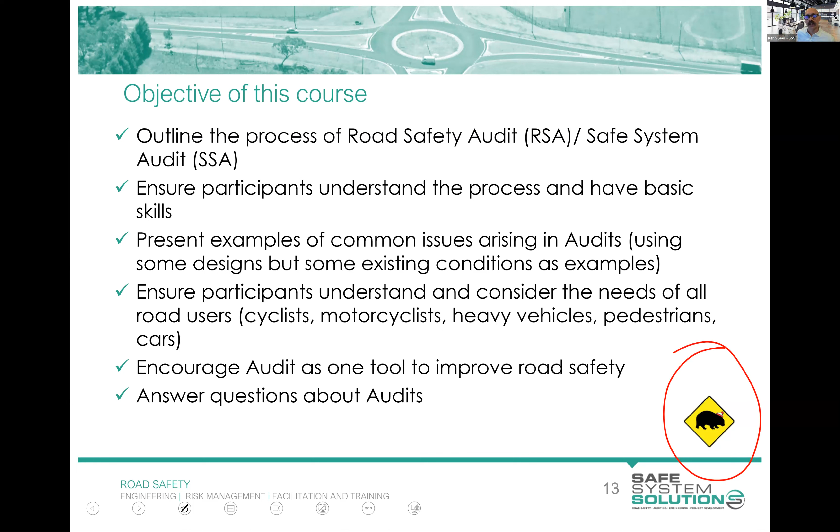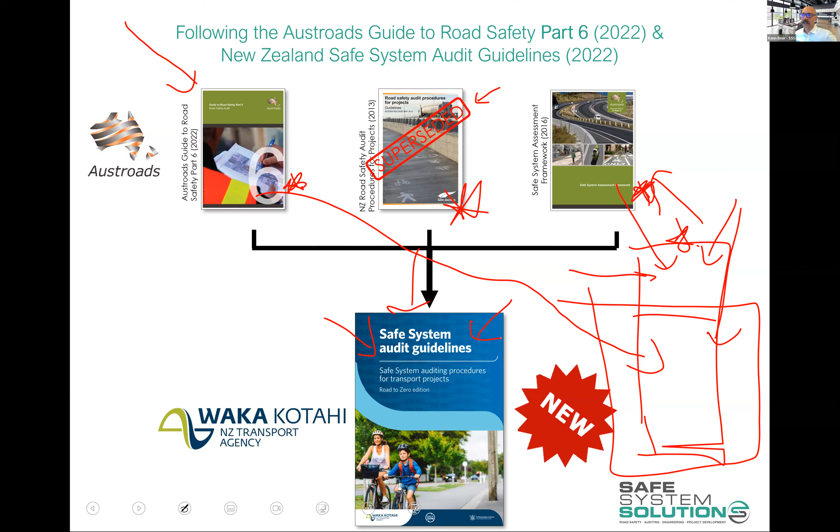You're all good, Ken. Okay.

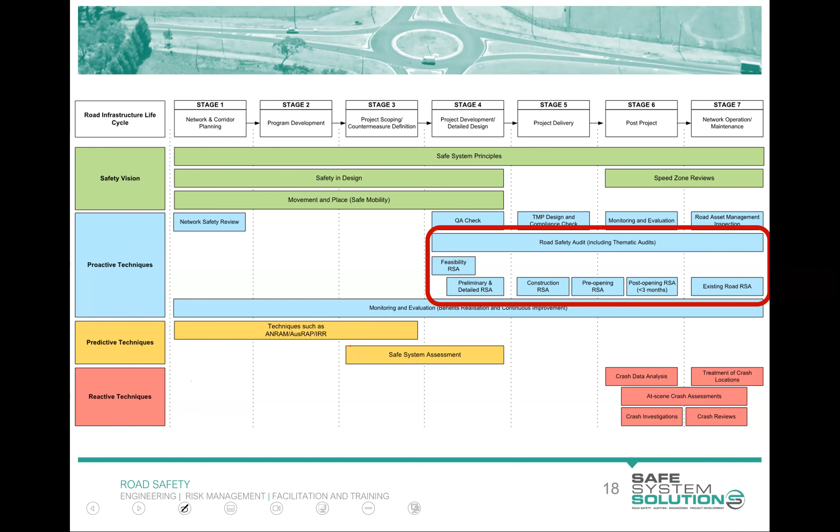And we have some questions. Bridget's noting that IRR doesn't incorporate speed, which is... well, it's because it was, I suppose, invented to be a way to look at which roads need their speed to be dropped. That makes sense. Actually, that's a prize-worthy comment to know that detail. Prize for Bridget.

Sean's also asking about the status of KiwiRAP and Waka Kotahi. It seems to be shelved at the moment. Any insights there? I'm not 100% sure. I use AusRAP a lot, and AusRAP and KiwiRAP are the same. But whether it's being promoted and used by Waka Kotahi is a fair question, and what changes are happening with it. I'll take that as a note and find out—having breakfast with a Waka Kotahi person tomorrow morning, so I'll be asking that question.

Okay, awesome. I just took a note of that.

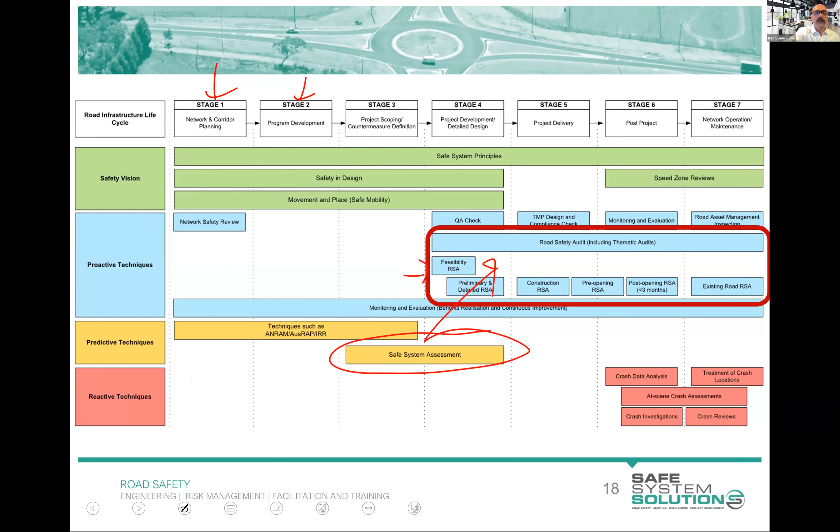But we're really going to hone in on this road safety audit. You can see that in the life cycle of a project, from planning a network and developing upgrade programs, you get to the point where you've got an idea of what's happening, or you've got a design, and then you look at how good that design is from a safety perspective. This safe system assessment is being thrown in there as part of this new process.

Okay, let's get into a little bit of the basics of the idea of road safety auditing safe system.

The first thing to understand is that meeting standards does not guarantee safety. It's a decent starting point to know what your standards and guidelines say and whether you're conforming to those. But a fundamental thing for an auditor is to understand that their job is not to assess conformance with standards and guidelines. Their job is to find out how our community is going to be killed or seriously injured. I don't care whether it meets standards or not. If there's a risk there, we report it.

Now, a fair question to ask is, why on earth would there be risk of death and serious injury if we meet standards? Well, that's a complex question, but there's a few reasons. One is that sometimes our standards and guidelines have done this old school way of thinking, which is to balance mobility and safety, and say we still need to move people around this network, so we'll just find a nice balance of killing our community with moving stuff around. We don't take that attitude anymore under a safe system approach. We say, no, we will make it safe, and then we'll move stuff and people around as quickly as we can within that envelope. But we are lagging a huge inheritance of standards and guidelines that don't think that way.

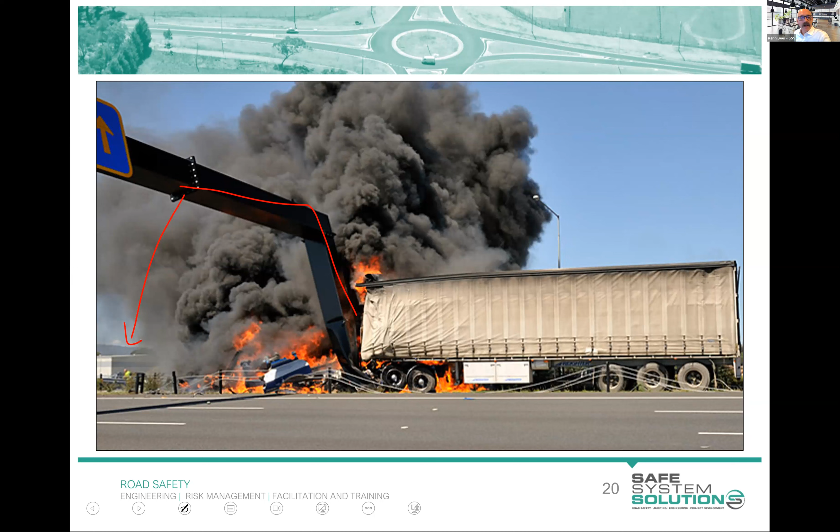So that's our test vehicle. Now, some of you might be trembling a little bit, thinking, oh my God, I don't know all of this stuff about barriers. Is this what road safety auditing is about? Am I out of my depth here? Don't worry too much, because you undertake audits in teams.

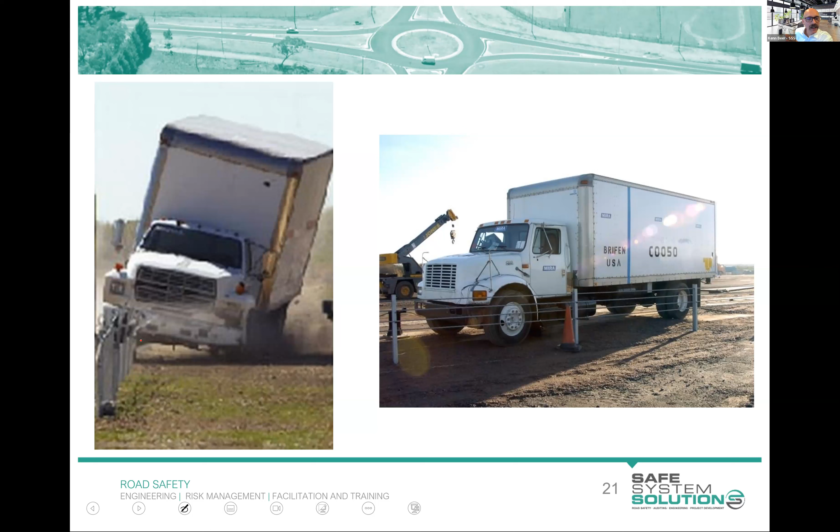And what you do is pull together a team that has the appropriate expertise. You would expect people in your team to have barrier knowledge that would understand some of this if you are doing that. You will build knowledge in these areas as you go about your auditing. Some of you might already have this type of knowledge, or at least know where to find that. But the important part is not actual technical knowledge here - it's asking the right questions. It's saying, when a large vehicle leaves the road, will that barrier hold it and contain it? And thinking about that context.

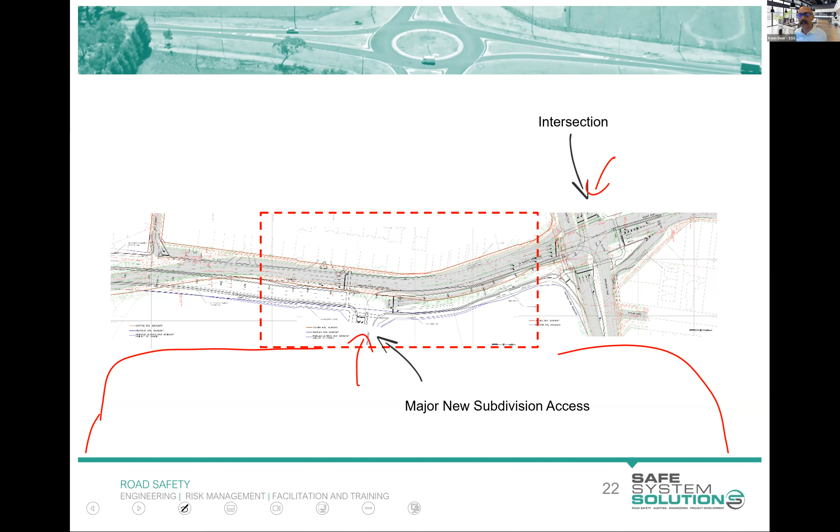I'm going to zoom in on this so we can see a little bit clearer. So here's their design and their plan, and this is the kind of time you are road safety auditing. Often you're given a design like this, a drawing, and they say this is what we're planning to build. And then your job as an auditor is to tell them what are the risks if they build it exactly as they've shown it. So here we see the new signalized intersection, this main street being new - it doesn't exist at the moment. And we're looking at this and we might find quite a few issues, and we'll be thinking about different things.

But here's one: if you're that car there, or we imagine a car there, and it's going along at, say, 65 kilometers an hour - it's a 60 zone, but maybe they're going a little bit fast - and they're traveling along straight through, so they're going straight.

Oh, I'm in a right turn lane. Okay, and this is what is termed a trap lane. A trap lane is a common thing that we find in audits. Trap lanes are not technically against standards. They are discouraged in some guidelines. Austroads discourages trap lanes, but you can't flat out say this does not meet standards.

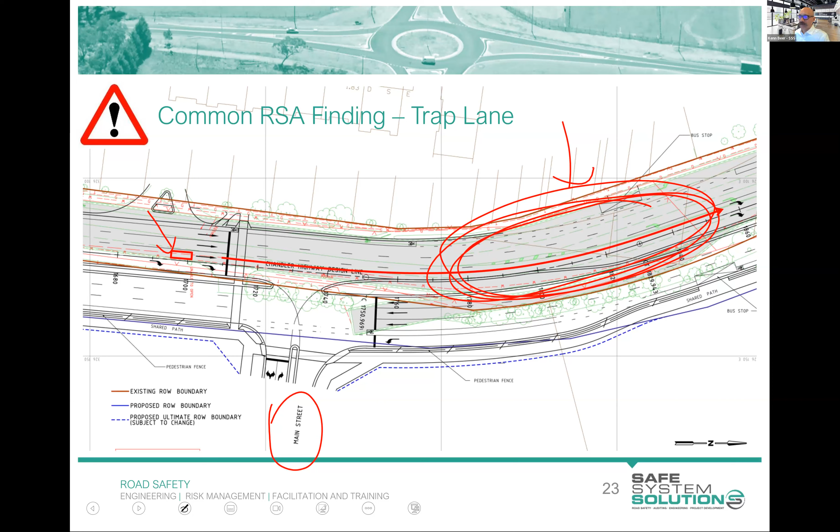But trap lanes are a common one. Now, Kathy, I think I've been doing enough talking here. I'll see if there's any questions, and then I'm going to get these people to do a little bit of... well, it's not really road safety auditing, it's looking at a crash and thinking a bit like an auditor. But anyway, I'll explain it. But anything I need to deal with?

Just to clarify, we have had this answered by others in the group, but is there ever an acceptable scenario where the design and the road safety audit can be completed by the same person?

No. You're sitting there trying to think of that remote regional outback location where there's only one person, but no. So it has to be independent, it has to be separate. Yeah, I was racking my brain to think of some unique thing, but no. I mean, and I will talk about this a little bit later on, but...

That's like saying, can you proofread your own letter? I mean, yes, you can look at your design with all of the knowledge you have as a road safety auditor, that you've done the design, you look at it, you're thinking about all of this stuff, but the independent check will identify things that you won't see yourself just because you're too close to it. And second of all, as I talked about with those major projects, or actually any project, if you are the designer or the project manager, you are dealing with all sorts of stuff.

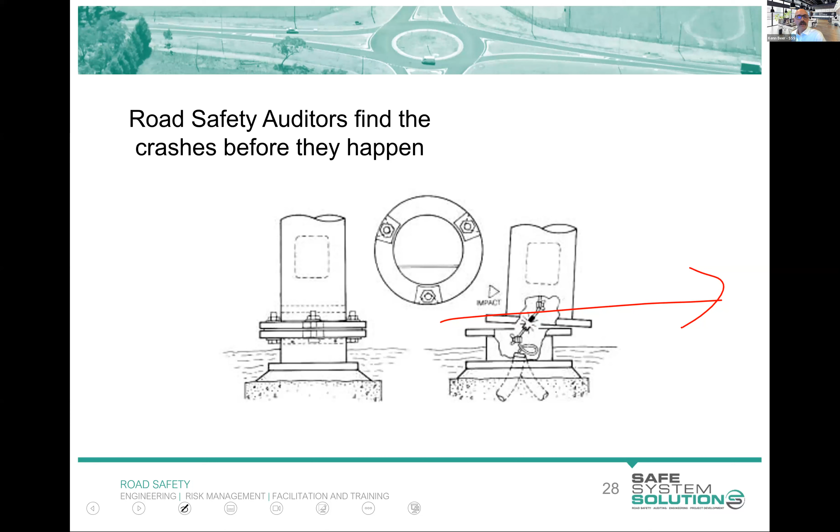So as a road safety auditor or a safe system auditor, we're really interested in, yes, trying to stop crashes happening, but also understanding when they do happen, how do we prevent our community from being seriously injured or killed? And how do we make it so it is just damage to the vehicle or the infrastructure, or very minor scrapes to those involved in these crashes?

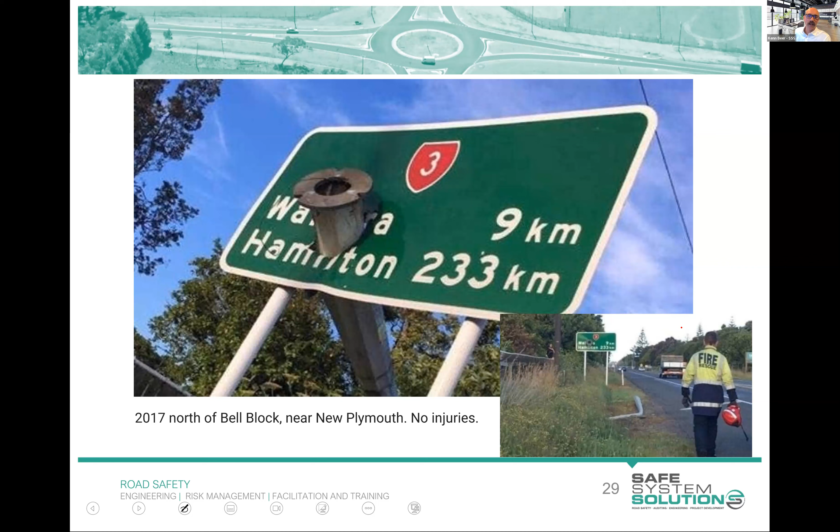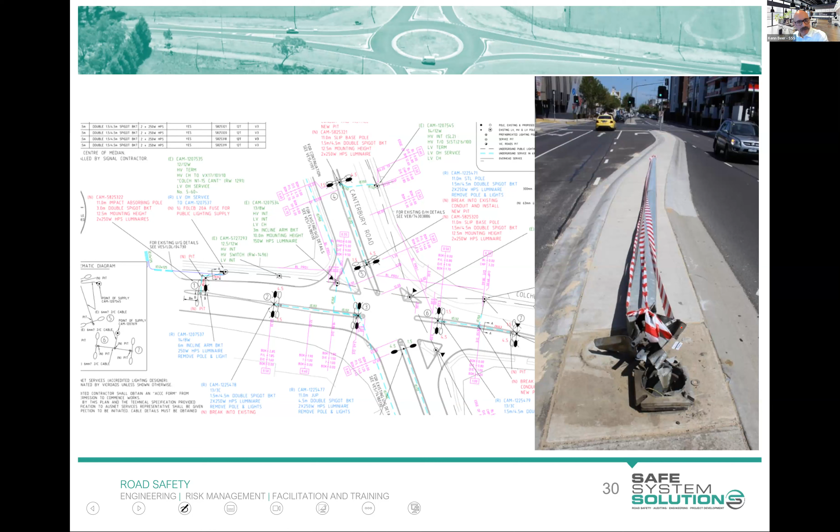You'd be thinking about a whole lot of things. Are those lights going to create one of those see-through effects? What type of poles are they using? Where are they located? Are they slip-based? Are they rigid? And maybe, in some of these locations, what could be the issue if they did decide to use slip-based poles for all of these lights? I mean, they're thinking about the safety of people leaving the road, hitting these poles. We've just talked about it.

But what other issues could arise if they did use slip-based? Anybody got any ideas on that? Pop it in the chat. All right, Will's on it. Prize there for Will, just first to get in, lots of others.

That's right, context. It's always important to think about the context of these things. We've just established frangible poles are great for the vehicle occupants, but they're going to fall. You saw one fling through a reassurance sign. If this is a heavily populated pedestrian area, vehicles are going to hit that, and then they're going to drop it onto pedestrians. So we need to be those eyes that think about the context.

Again, it's standards and guidelines. Some standards and guidelines will pick up on this, and some standards and guidelines talk about you can't use slip-based poles in speed limits under 50 or 60 kilometers an hour. But where the poles are going to fall, pedestrians, power lines, and the like, is an important factor for us as auditors to consider.

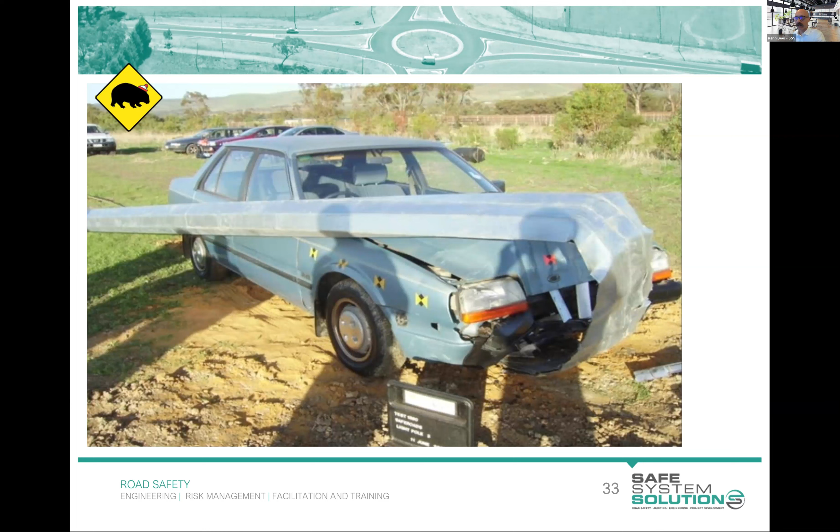So we want to think about where they fall. Where are they going to fall if they're slip based?

Kathy, I think we might take a 2-minute break.

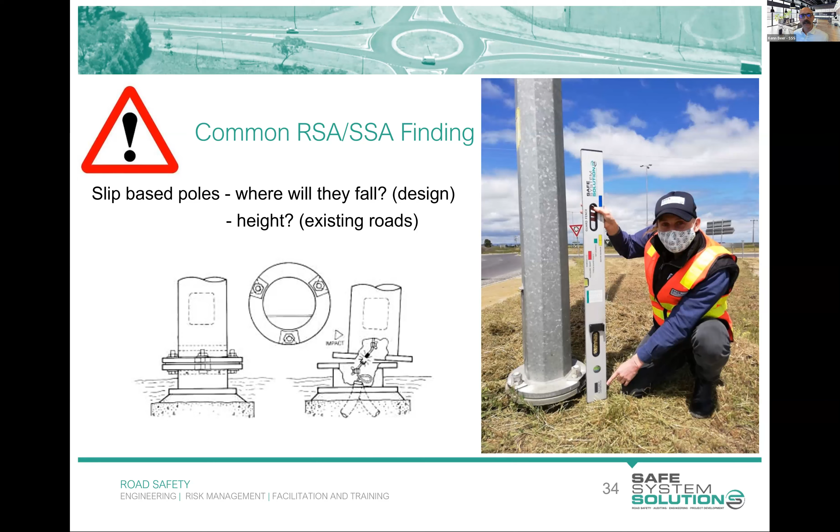Sounds good, Ken, because it is half time or intermission, depending on your brand of choice.

Now, I did want to answer an earlier question about the certificate people get for this. I can't quite find the question at the moment, but it was whether the certificate will be in the SSA, the Safe System Audit format, or the Road Safety Audit format. At the moment, this one will give you a certificate that says Road Safety Audit. If you've previously done the Safe System Assessment course, that program and this program together are kind of like your Safe System Audit. But later this year, we'll be working on combining the two programs and offering one. We are very much in that transition stage at the moment, so you won't be missing out on the latest and greatest, because you're getting it as it comes to us. So this very much is a bit of a road safety audit / safe system audit type course at the moment.

Would that be right, Ken? Yeah, the certificate you get from this, you are absolutely able to undertake a safe system audit, and you meet all the requirements around that. You will just need to either skill yourself up or do our course on the safe system assessment part of that. There's nothing stopping you from undertaking that process once you finish this, you just need a little bit more knowledge. So hope that answers it.

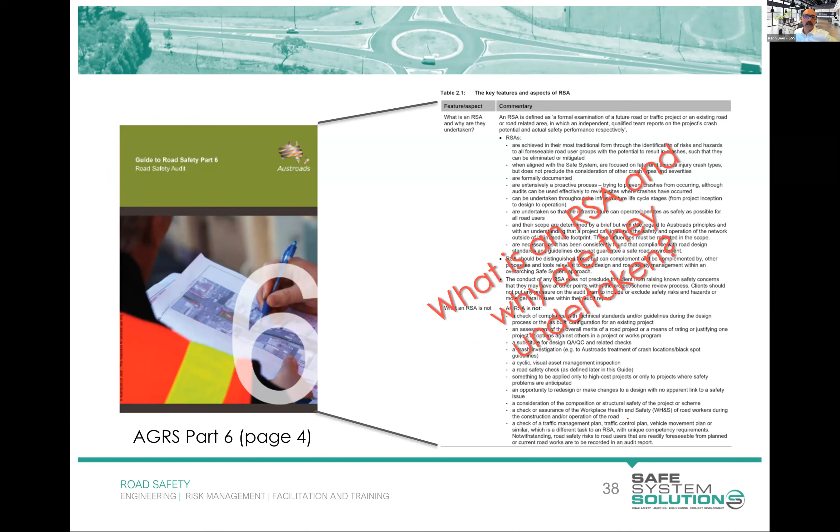Now I'm going to take you through what a road safety audit is. And as we said, safe system audits, New Zealand's down that track is a little different. But you need to know, okay, what's a road safety audit? It's a formal examination of a future road or traffic project or an existing road or road-related area in which an independent qualified team reports on the project's crash potential and actual safety performance. That is the Australian definition.

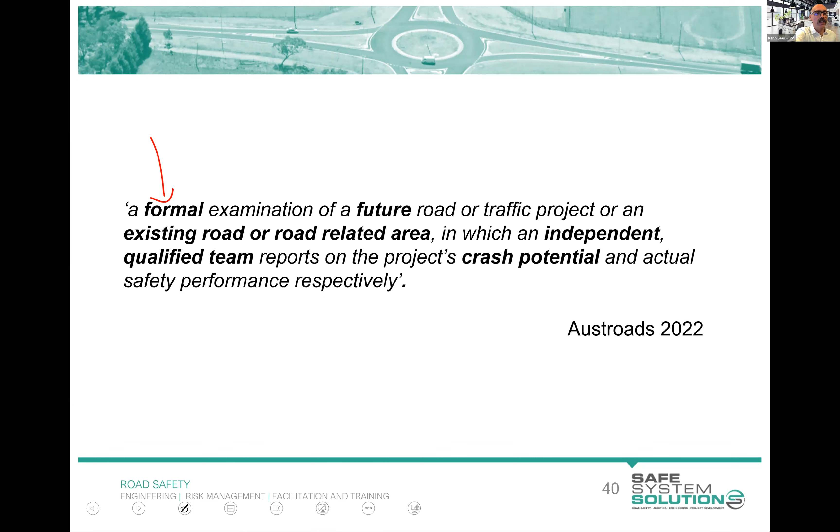Okay, it goes in and then it starts to elaborate on a lot of that, but that's part of it. It's formal - there are specific steps to take, and there's a formal reporting mechanism, and you sign it off at the end. These are formal documents. We do it for future projects - you can, in a lot of jurisdictions, do it for existing roads too, but future road projects, so designs.

Independent, we already talked about - can't audit your own design, can't audit your own project, can't be the project manager of it. You can't even audit if it's within the team that you're manager of, because you're not independent - you're being influenced by a whole lot of other things. Qualified teams, yeah, so as we say, completed this course or other relevant courses, and we're thinking about what are the future crashes that are going to happen.

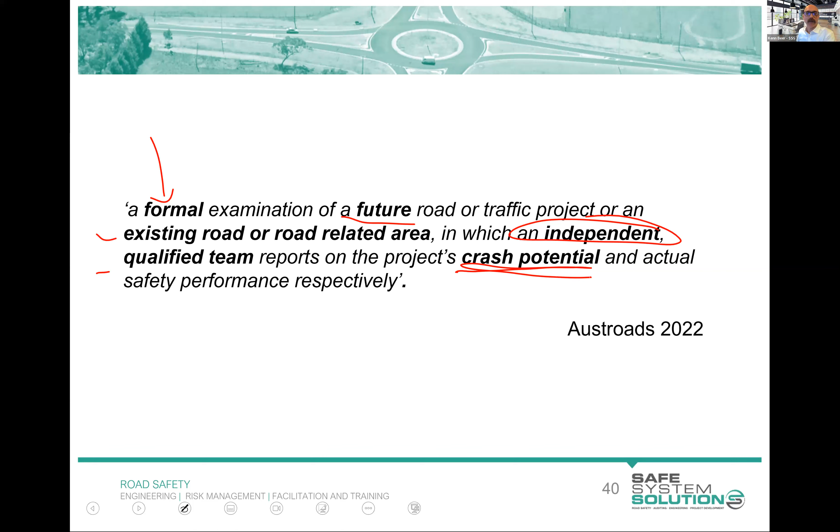When we look at a safe system audit, there's a lot of similar characteristics. It's a formal, robust technical assessment, same as a road safety audit, but with independent and qualified teams. We're considering the safety of all people, no matter what mode, and applying safe system principles. It's also not a review of compliance with standards, same as before. So it's very much the same, just slightly different ways that we piece this puzzle together in a safe system audit.

The safe system - I think most of you will have had this drilled into you many times in your organisation. New Zealand is doing a wonderful job embracing the safe system approach. This is the safe system diagram for New Zealand, and it sets a platform for how we're going to eliminate death and serious injury over the long-ish term. But there are some really important principles in there, and I want to highlight a few of them.

We design for human vulnerability, especially important when we consider road safety auditing - we need to know the forces that are going to happen on the human body. The other key ones: we make safety a critical decision-making priority, so as we develop these projects this process can really help. And we promote good choices but plan for mistakes, which means we've got to manage the energy in crashes.

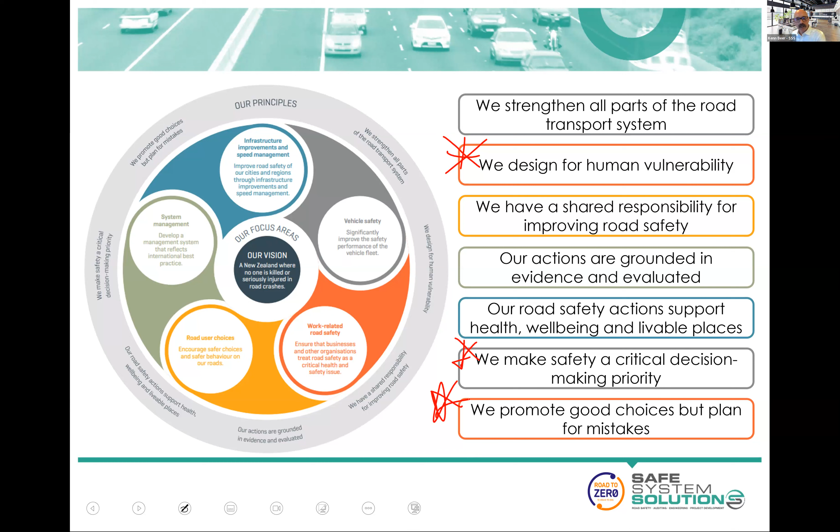All of the other principles are still important and integrated in - those just have particular grabs for a road safety auditor or a safe system auditor. That's a bit philosophical at this stage. I'll jump you straight into an example very shortly.

But let's have a little quiz just to check where we're at. Some of this is going to be a little bit testing because it's not exactly what I said. You are not marked on these little quizzes that pop up - nothing in the actual live course you're going to be marked on, but this is just to get you doing something again. So hopefully a poll's popped up on your screen. It's got four questions - a few of them we've been through, and a few might need a little bit of thinking and head scratching because we may not have exactly covered that.

Thanks, Ken. A question that's come through is: can you do a limited scope audit, i.e. a cyclist or pedestrian users audit, and not take into account cars and trucks? It seems counterintuitive and wrong to look at it from a limited scope - what are your thoughts?

It's what we call a thematic road safety audit, and we'll talk about it in the cycling module of this course. It's like a cycle path, for example, that's crossing roads - you're focusing on the issues for the cyclist, not so much the approaching vehicles and their potential issues, though you do factor a little of that in. In practice, I don't often encourage thematic audits. Where I actually see the most beneficial is motorcycle audits, where you get a motorcyclist out there and they tell you things - this is what we felt from a motorcyclist perspective, because driving through a route you don't quite get that same feel.

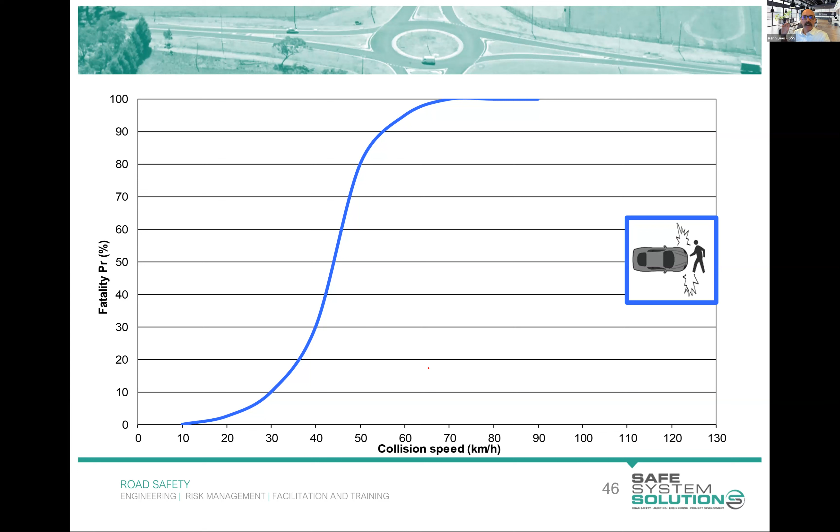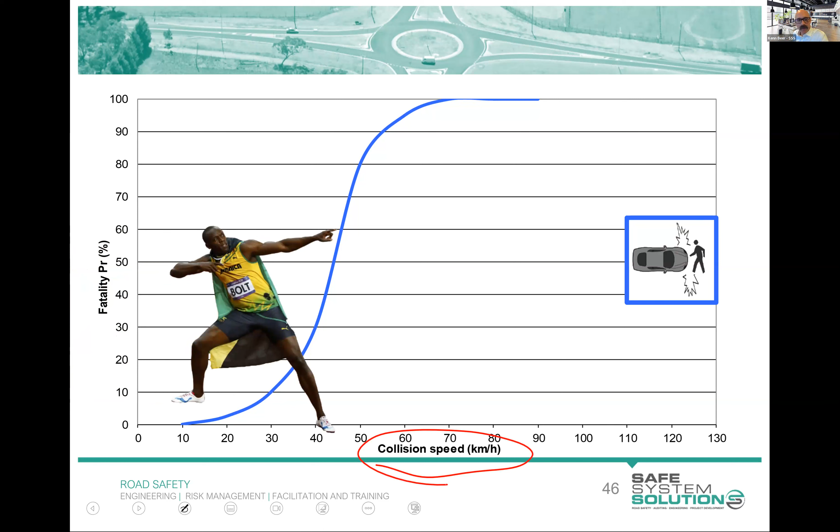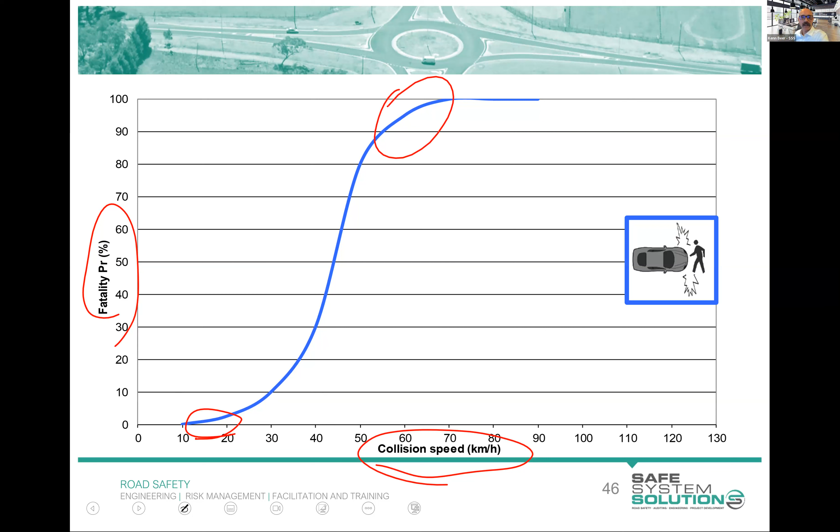Now, tiny little bit of difference in the physics here, but when a car strikes a pedestrian at 44 kilometres an hour - Usain Bolt's there - this graph shows collision speed of impact, not speed limit, just speed of impact, and the chance it's going to kill a member of our community, not Usain Bolt, any member of our community. At very low speeds, it's very unlikely that anybody struck will die. Then up at, you know, 60 kilometers an hour, when a car hits a pedestrian, we're pretty confident they're going to be killed. There'll be circumstances and occasional occurrences where they won't be, but it's going to be bad.

And the reality is the road network presents us huge areas that are far beyond the forces we can handle. We need to look at redesigning the road network so we don't have those forces imparted on humans. Yeah, the vehicles may crash at high speeds, but they should be managing the energy. We have this information for other crash types as well.

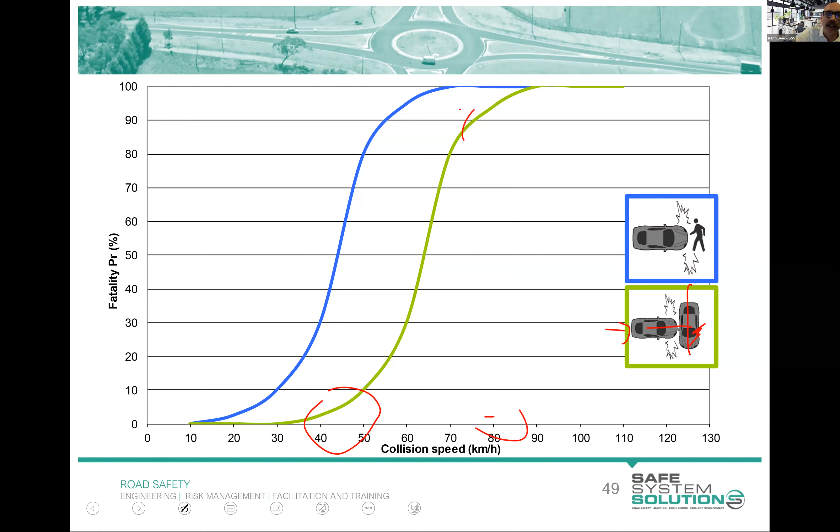Side impact crash - many of you have seen this already - we've got the bullet vehicle here doing the damage. The bullet vehicle speed, around the sort of 40, 50 kilometers an hour, is generally survivable for the occupants of the target vehicle. Up around 80 kilometers an hour is fairly unsurvivable for the target vehicle occupants. And head-on crashes, we're talking around that sort of 60, 70 kilometer per hour speed of each vehicle, so it'd be a closing speed of 140. Impact speed for the individual occupants is a 70 kilometer per hour crash.

But they give us a little bit of understanding about what kind of forces we're thinking about in crashes. And we tend to draw this sort of 10% line: 30 kilometers per hour for the pedestrian crash, 50 kilometers per hour for the right angle crash at the intersection, 70 kilometers per hour for the head-on crashes. They're about the limits we impose under the safe system threshold speeds. There's lots of debate about adjusting this, people doing their PhDs on trying to adjust this, debating whether we're ignoring these bits down here and the like, but for now we really talk to those as a threshold speed.

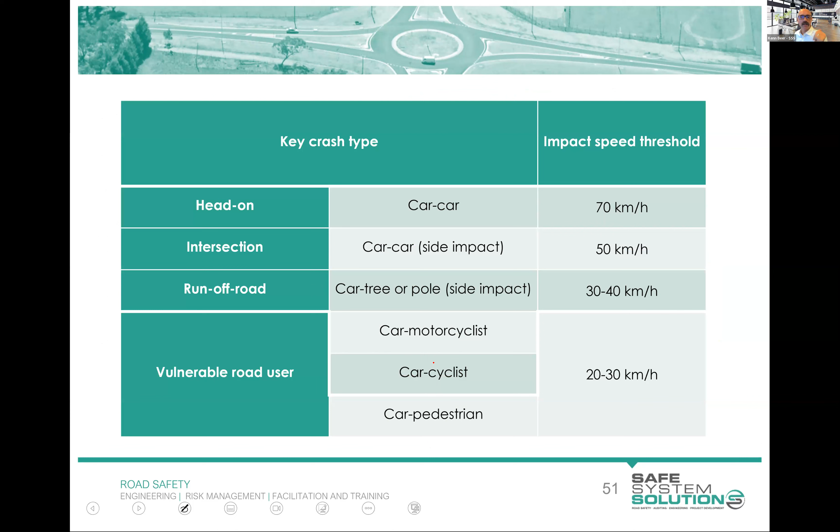And I've popped some more in there, and these are in your notes. We've got side impacts with poles around that 30 or 40 kilometer per hour, or trees - it's pretty low speed where it's very severe. Side impact into a pole is a serious incident. So you can see those put in there, motorcyclists and pedestrians.

Okay, so the old sort of road safety audit model, and some of you probably were very involved in this and have done them. We identify an issue, give it a risk rating, and then we recommend treatments.

The new safe system assessment model sort of goes, okay, let's do this safe system assessment matrix, which we're not going to take you through in detail in this course. We identify issues, we risk rate the issues, and we look at that biomechanics of injury. So those forces that I was talking about in the last slide. Where does this sit? Are we talking about lots and lots of minor incidents, or are we talking about a few fatalities or serious injuries?

So highly severe incidents. Then we recommend treatments, and we give a little bit of help to the designers and the project team to say, these treatments that we're recommending are the ones that are really going to eliminate or get us close to eliminating death and serious injury. And these ones are going to lower the risk of it. So that's how we categorize.

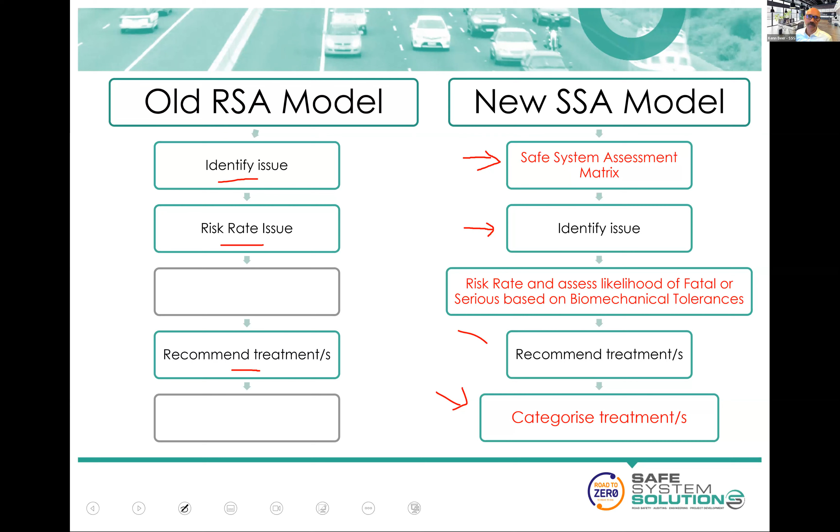The easiest way for me to explain this is just to take you through an example. And this is what we're going to do. I'm going to run you through an example, and then in future modules, you're all going to have a go at this. So you're starting to build up this practice of finding an issue and then reporting it in the correct way.

Okay, so here is an intersection. It's new. They're planning this new intersection. It doesn't exist at the moment. They're doing a left turn lane. We've got a hold line there. It's a high-speed road here and another high-speed road coming into it. It's a T intersection.

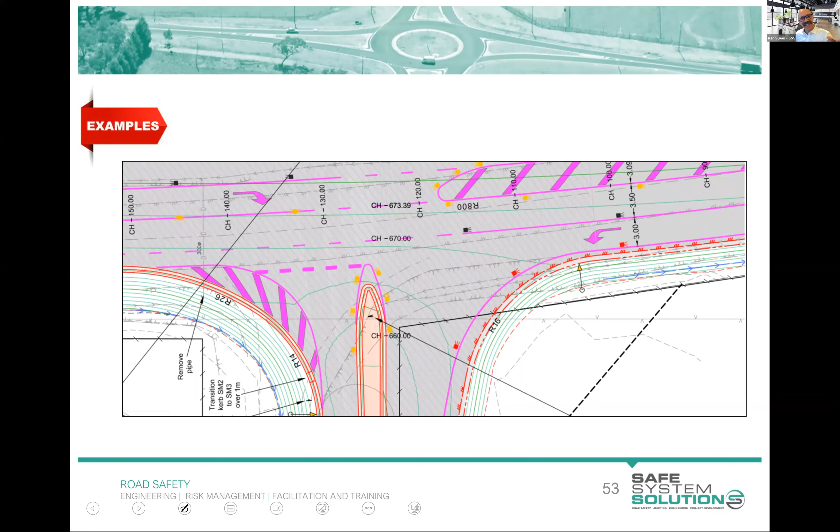Okay, it's what we call a dynamic visual obstruction. So it's a visual obstruction. It's moving. It's not always there, but we know from that configuration of that design and that scenario that this is something that we see death and serious injury result from.

You often say, why have they pulled out right in front of that car when you're doing the crash investigation? But it's because at that exact time, there was a vehicle masking the view of it. And it can be exacerbated by vehicles queuing behind, and maybe it's been a minute or two and there's people beeping and they're like, oh, as soon as this car goes, I'll go, right?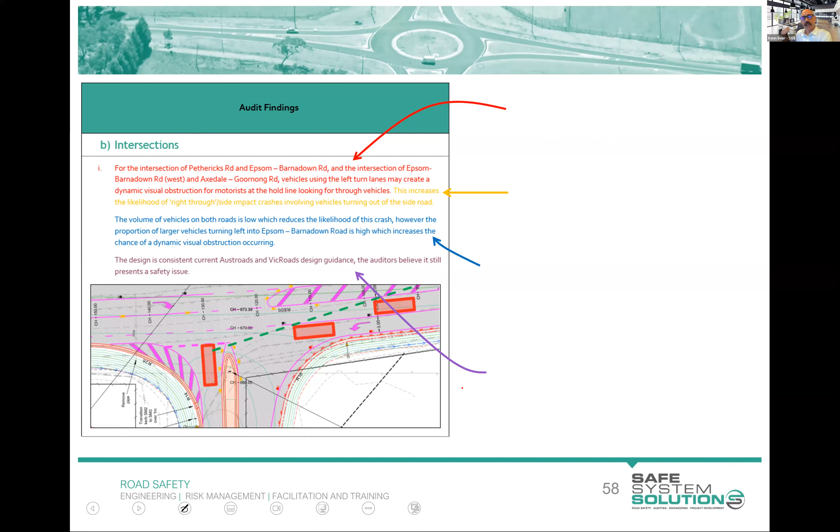And I've created the formula or the recipe. And when you're writing up your audit findings as part of this course, you will be marked on whether you're following this formula. It's good practice to follow this. When you're a very experienced auditor, sometimes you might play around with this, but as you start entering into it, just follow the formula. And the formula goes as such.

Let's explain the issue. The intersection of blah, blah, blah—vehicles using the left turn lane may create a dynamic visual obstruction for motorists at the hold line looking for through vehicles. Okay, you've explained the issue and where it is.

The yellow there is the crash. This increases the likelihood of right through side impact crashes involving vehicles turning out of the side road.

I don't care how blindingly obvious it is to you when you're writing your finding of what the crash is, you specify it. That makes sense? I don't care if you're talking about a pedestrian crossing, a vehicle overshooting the pedestrian crossing, or not having good sight lines to the pedestrian crossing—you still spell out that this could, this will result in a pedestrian being struck by a vehicle. Actually specify the crash you're thinking about.

If you can't specify a crash, it's not a road safety audit issue. People do that—you might think, why would they do that? Well, they don't like some little bit of drainage happening off the side of the carriageway, because maybe they're a very good drainage person and designer, and they say the issue is that this drainage will cause erosion to this part and seep into this house. Okay, that's not our issue. That's not a road safety audit issue. That's an issue for the project, and you might send them a little email: hey, I noticed this, by the way—not going in a road safety audit report.

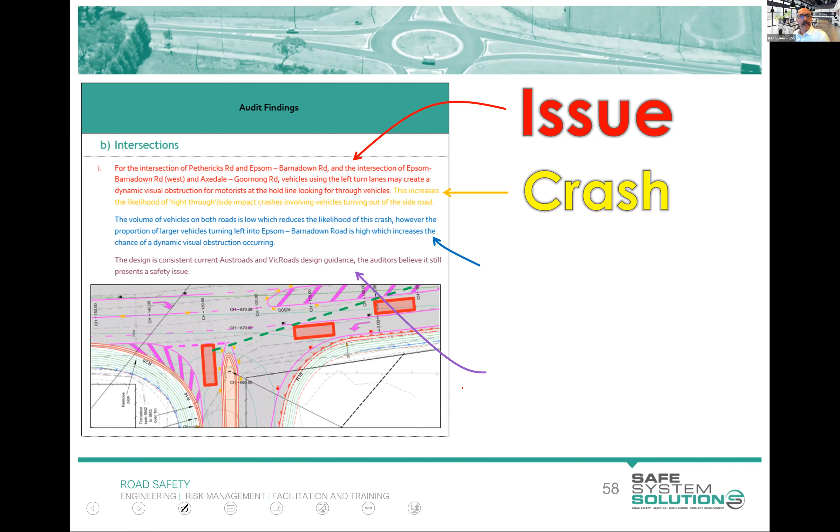So what's the crash that could happen as a result? Then you make some general commentary about what factors may increase the risk, decrease the risk, or alter the risk. In this one, we say the volume of vehicles on both roads is low, which reduces the risk—not many vehicles on these roads. However, the proportion of larger vehicles turning left into Epsom – Barnadown Road is high, which increases the chance of the dynamic visual obstruction. A bigger vehicle turning left is more likely to mask that other vehicle, so we're more likely to see that happen.

Then this purple one: any standards or guidelines, if applicable. Remember, standards and guidelines are not what we're checking against. But if you actually happen to find that this does not conform to Austroads or Waka Kotahi guidance or local council guidance, and you've got that, great—put it in. It just backs up the finding.

Interestingly, on this one it said the design is consistent with current Austroads and VicRoads design guidance, but the auditors believe it still presents a safety issue. There's one that actually just flat out said: hey, we know this meets standards and guidelines, doesn't mean it's safe.

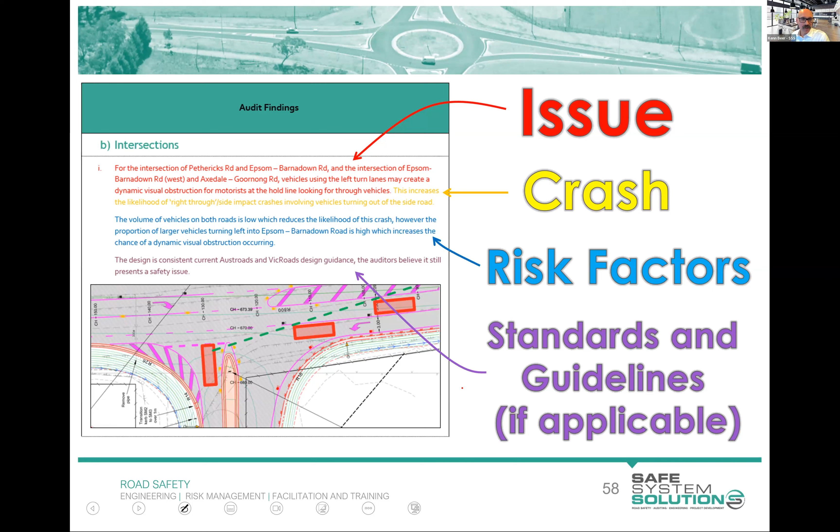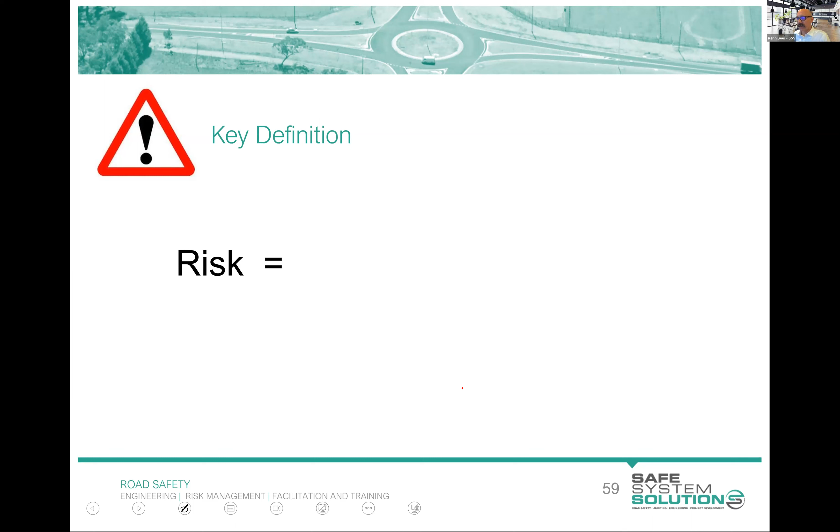So then we've got to risk rate this. Now, risk is the chance of a crash happening—the frequency of it, the likelihood of it—multiplied by how bad it's going to be.

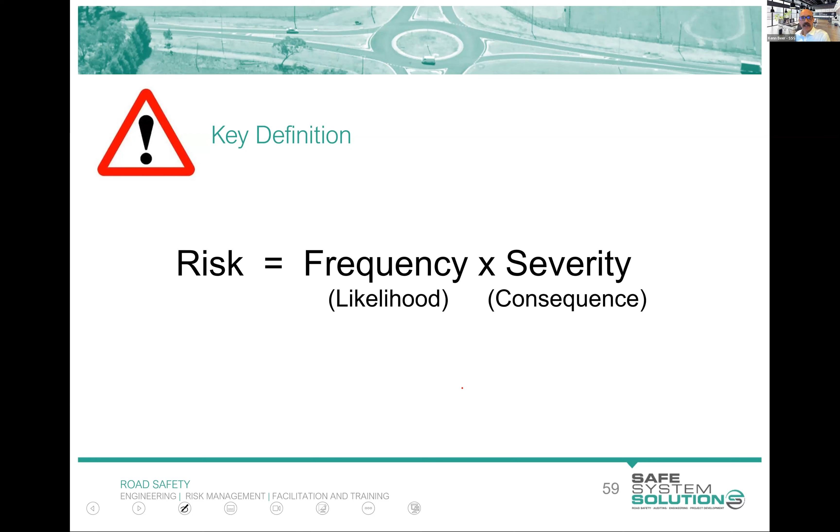For the road safety audit component of a safe system audit, that is what we continue to use. In the safe system assessment bit, the first little bit you'll do in a safe system audit, you add exposure here, or you extract exposure out by itself—but it's still frequency, severity, or likelihood, consequence, or however you want to talk about it.

This is the table that's straight out of the new Waka Kotahi guidance. You can see here what is the chance a crash will happen, and then how bad is it going to be, and then you find the corresponding risk. So if you say it's going to happen a lot, but it's really only going to be property damage, it's minor—that is the risk.

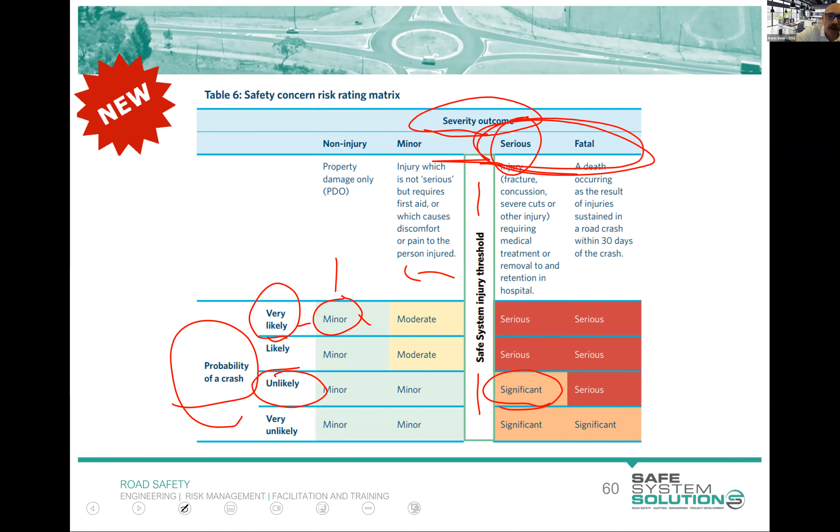But if you say it's unlikely to happen, but when it does happen it's going to be serious, the risk is significant. You can see here they've added in this safe system threshold, injury threshold line, because we're worried about fatal and serious injury the most. It doesn't mean that something on the left of this line isn't something we should look at, but we're more okay with things to the left of this line than things to the right.

So you have to be a bit of an investigator to find this, but 'very likely' is talked about as one per year you'd expect that crash of that severity to occur, and 'very unlikely' is sort of one per ten years plus. That actually comes out of the previous version of the Waka Kotahi guidelines, but you sort of have to take that through.

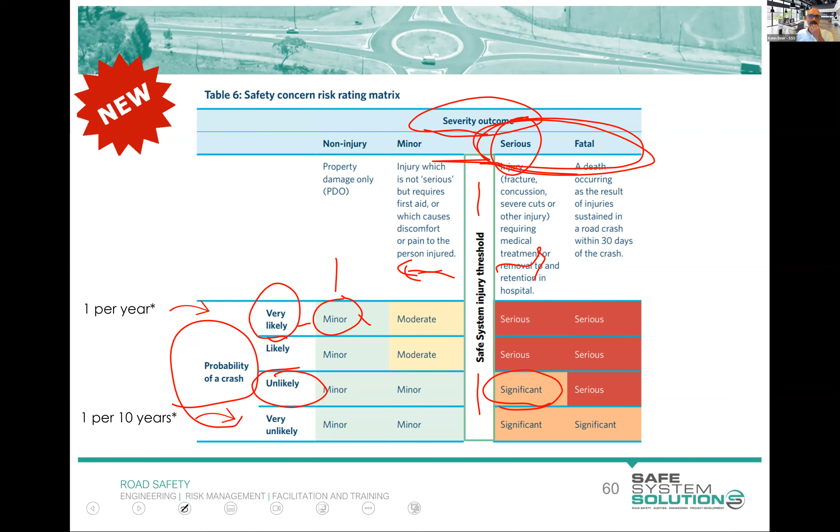Ken, just a question. It always struck me that significant seems more likely the word to use for the highest risk, and that serious would be second. Oh yeah, right. Well, yeah, good spotting.

So this varies from what Austroads has put out in a number of ways, and I think this is probably one that you might see changes in 6 months' time when they take all the feedback, because there's a few things that people are quite uncomfortable with. I redid the Austroads one, and I made it a 5x5 matrix, and I used intolerable, I think.

I mean, the wording's a little bit weird, but you'll discover that there's a lot that sits in that significant categorization, which is somewhat an intentional decision, but practically you don't have enough granularity here to really prioritize things, in my opinion. But it's good in one sense, it shows the serious and significant nature of it.

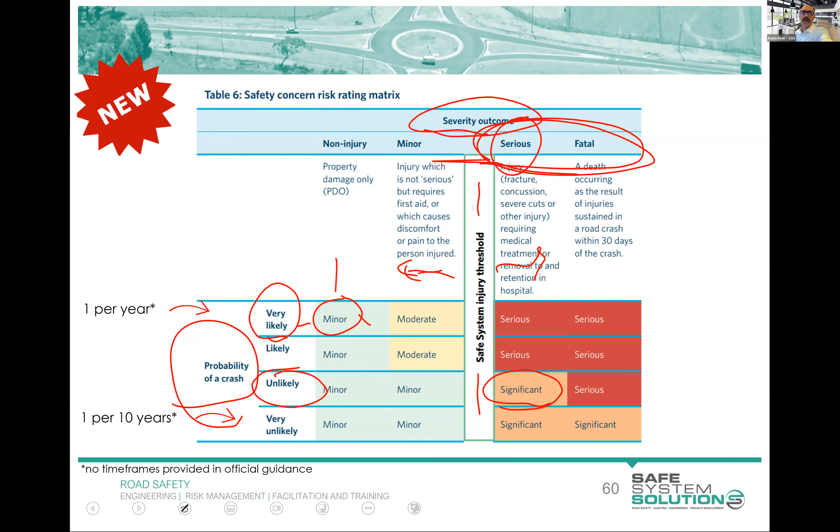But yeah, so I agree with that point. But like when we're talking about this severity of outcome, fatal, serious, minor, other, this is where we're starting to say, well, the speed and the crash type, is it going to be above or below the line that helps you understand?

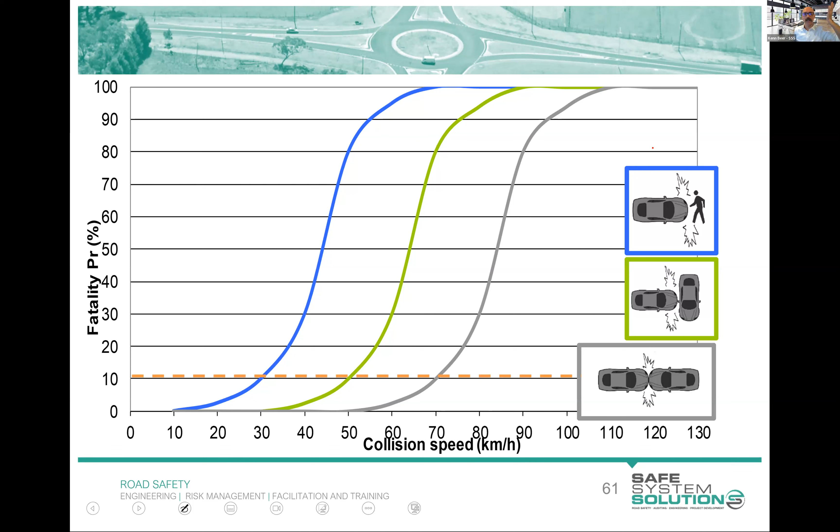Is it going to be serious, fatal, or is it going to be some minor incident? So we then go, okay, what is the risk here? And we say, what's the chance of this crash happening? And we say it's very unlikely, because we've established that, well, we know there's an issue. We've established it's low volume.

Okay, you've got to get this scenario to all come into play together. You've got to have that large vehicle. It's got to be left turning. You've got to have the masking, and you've got to have the vehicle there that's coming out, and they've got to have made a bad decision. Okay, we know it'll happen, but how often is it going to happen?

We know there's a lot of this out there, and we sort of know a bit of the frequency of it, so we're going to go with very unlikely. Maybe it's unlikely, but it's not going to happen every year that we see a crash as a result of dynamic visual obstruction with these traffic volumes. If it was super high traffic volumes, we'd probably be upping that, but that's where it sits.

But when it happens, it's going to be bad, right? This is side impact. We're talking about 80 or 100 km/h speeds for the bullet vehicle. It's unsurvivable. Okay, it might be freak incidences where it's survivable, there'll probably be a lot where they clip the front or back of the vehicle and it's survivable. But generally, we know when that happens at a square hit, it's unsurvivable. The resulting risk is significant.

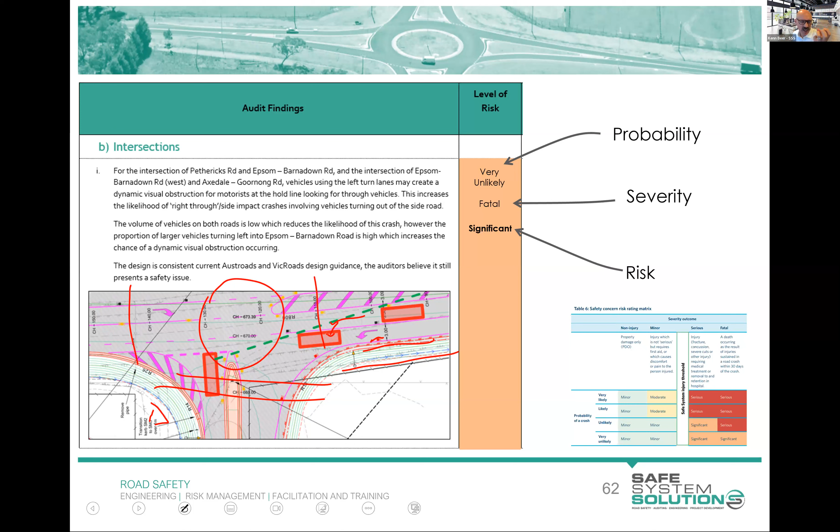Yeah, all of those have advantages and different disadvantages. They have effectiveness differences as well. And some of them treat the chance of the crash, and some of them treat the severity of the crash, and some of them treat both. So how do we provide a little bit of guidance to the project team on which of these is the one that you'd really like to do, and which of these are not as good?

And the way we do that is to say, here's either a series of things that you could do, or here's one thing that you could do. But we categorize each of those, and we tell them either primary treatments or supporting treatments. Now this is probably going to confuse some of you. If you've done the Safe System Assessment course, you've had a lot of practice at it. But I want you to think of these as little buckets, not as a label. These are buckets of treatments, and there's a heap of treatments in the primary bucket — it could be roundabouts, raised intersections, this or that. You might pick one of those from that bucket. Supporting are things like line marking, lighting, and the like, so you can pick from that bucket too.

But these primary ones are what we'd say are any planning or design considerations that virtually eliminate the potential for fatal and serious injury occurring associated with that particular crash type. That's going to be key to you — crash type. Supporting are things that are going to lessen the chance that crash is going to happen, but they're not going to virtually eliminate that crash type.

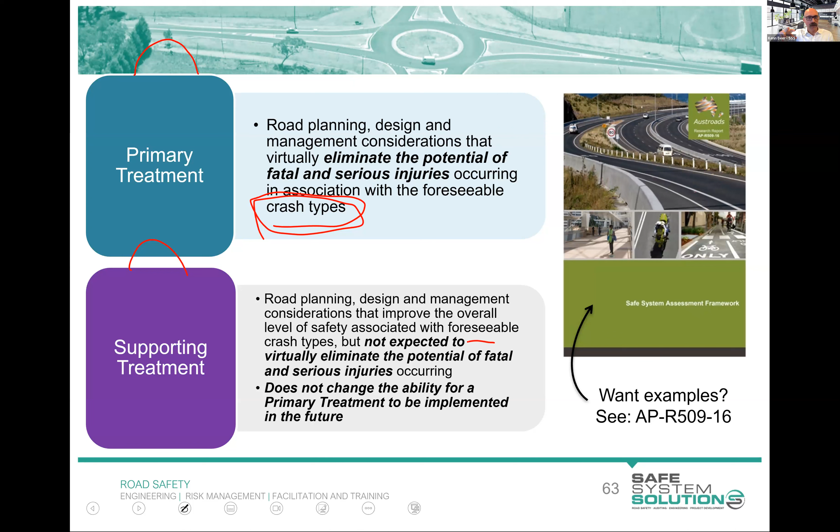So I'll explain that with this one. We'd say: implement measures to reduce the speed and/or angle of impact at this location. This could be achieved with a roundabout — primary. If this could not be achieved, implement measures to improve sight lines at this location, such as increasing the offset of the left turn lane — supporting — relocating the hold line forward if it can be done safely. Notice with that last one, we're not doing the design ourselves. They can look at whether it can be done safely and adjust. We're just flagging that's your issue.

Now, why is increasing the offset not a primary treatment? So we make the left turn lane down here, we'd have some sort of hatched area, maybe. We've opened up this sight line — the dynamic visual obstruction has been removed. Why is that not primary? Because we're talking about the crash type, not that particular issue. The crash type is a side impact with this vehicle. That can still occur. It's less likely because we've opened up the sight line, but the crash can absolutely occur at the same speed when this person makes a mistake and comes out there. They may be distracted by something, for one reason or another.

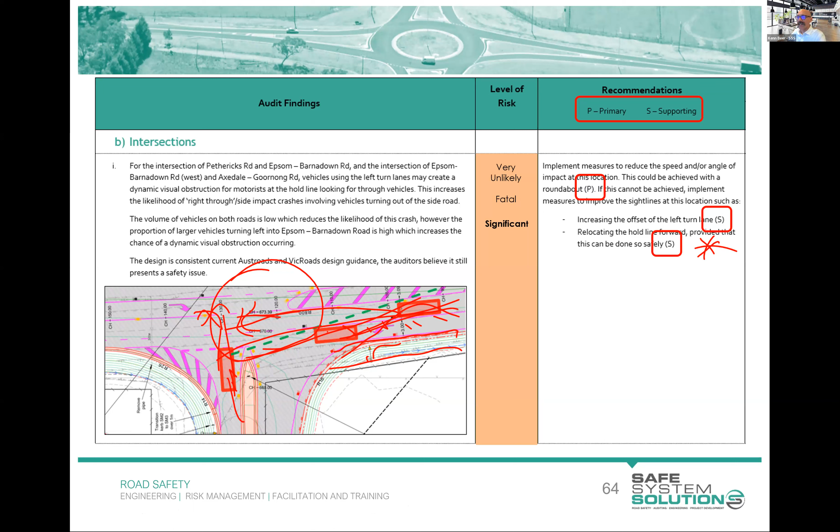So it's not going to absolutely eliminate that crash type, which is a side impact crash at that speed, whereas the roundabout virtually does eliminate it. They slow down on the approach, and we may still see some side impact crashes, but they're not going to result in death or serious injury because they're low speed and the angles are better. I hope that gives a little insight into how you categorize these. We're going to give you some practice in this, because it's something a little bit tricky.

Kathy. Ken, is it possible to suggest something a little bit different and innovative, such as a convex mirror opposite the intersection, to see if there's a car obscured by the truck?

Okay, good question. You want to be careful about what you recommend so it doesn't create other risks. As an auditor, if I'm suggesting something I know has other risks associated with it, I need to be very clear about that in the writing. So if you really thought a convex mirror was a good idea there, you'd say: if none of this can be achieved, consider a convex mirror, however this does come with some risks associated with over-reliance, graffiti or damage to the mirror, and list some of the other things. That way the designer and project manager, who may be between a rock and a hard place, can go 'something's better than nothing, I'll take that, but I'm aware of these risks.' I was just finishing off a convex mirror fact sheet actually, because convex mirrors come up a lot.

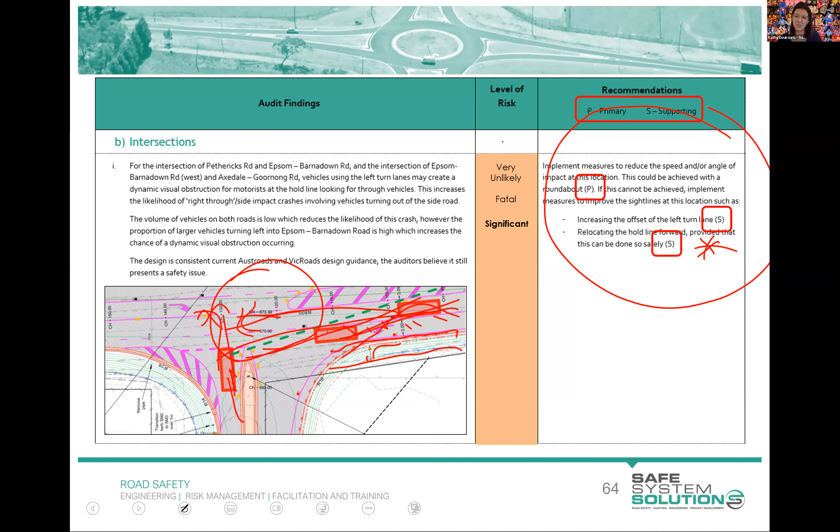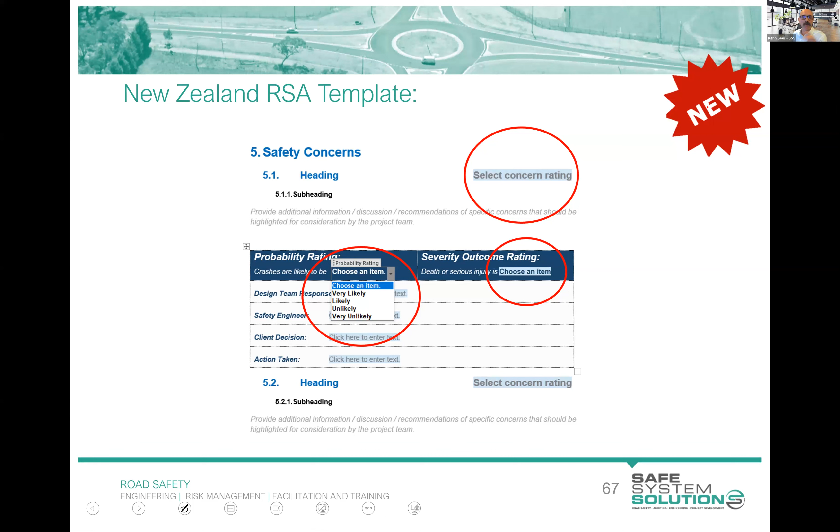So there's a little example. I'm going to get you to practice some primary stuff later on. Primary treatments, they either address the consequence of the crash or they virtually eliminate it. Some of you are going to be really good at this, we'll give others practice at it. It's going to be a little bit of a hard thing to do. In the Waka Kotahi standard template document, which you will be using, you can see there's some drop downs in terms of probability and severity, so you can put them in easily, and you'll get some practice in using this as getting to risk ratings.

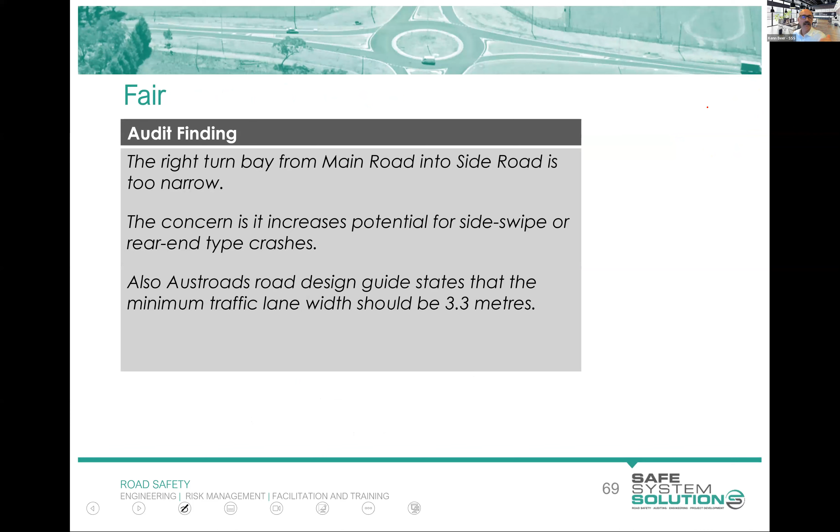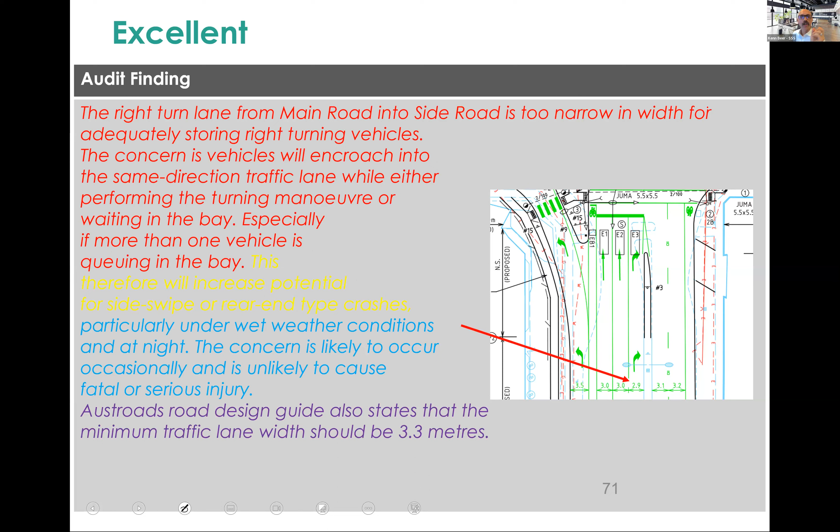I'm going to just skip over this example, but you can have a read of it yourself. It's just saying this is poor, there's just not enough information there. This is fair because you're starting to spell out that information about an issue. This is great, okay, I've got a snip of the plan. I've pointed at it. I know immediately, without even having to read all that, right turn lane's too narrow. That's going to cause side swipes and rear end crashes. We know that. I know exactly which leg it is, and that's what it is. You can break it down to that formula: issue, crash, risk factors. And this one has standards and guidelines that it doesn't meet, so we chucked it in there.

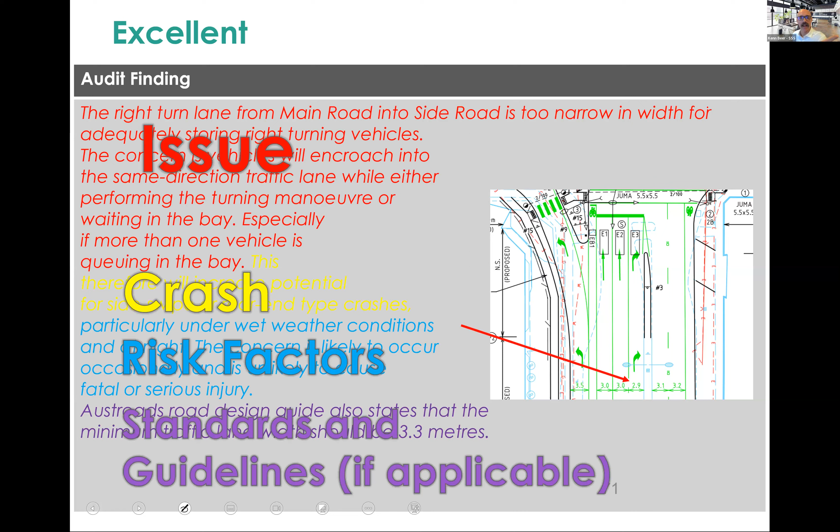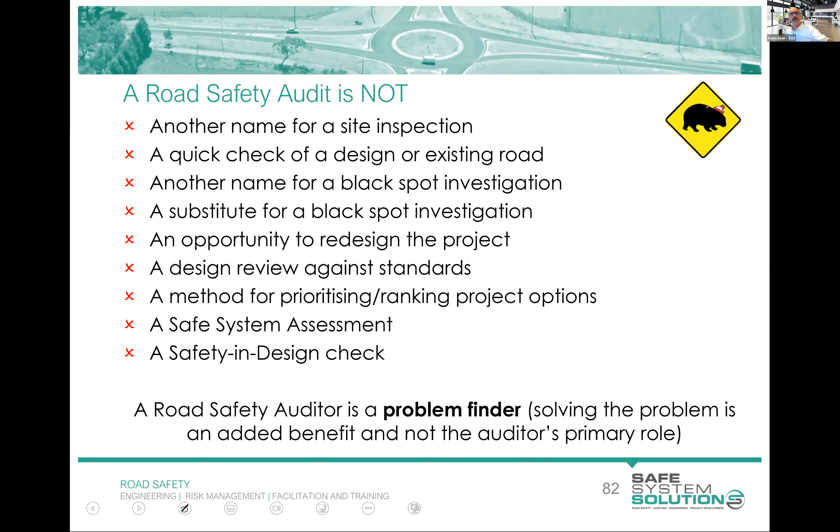Road safety audits, they're not just a little site inspection or a quick check against a design or a crash investigation or that standards review. We've defined what they are. There's something else, and you can audit anything that interacts with the road: big projects, small projects, pedestrian projects, work sites, innovative things. You can audit a heap of stuff.

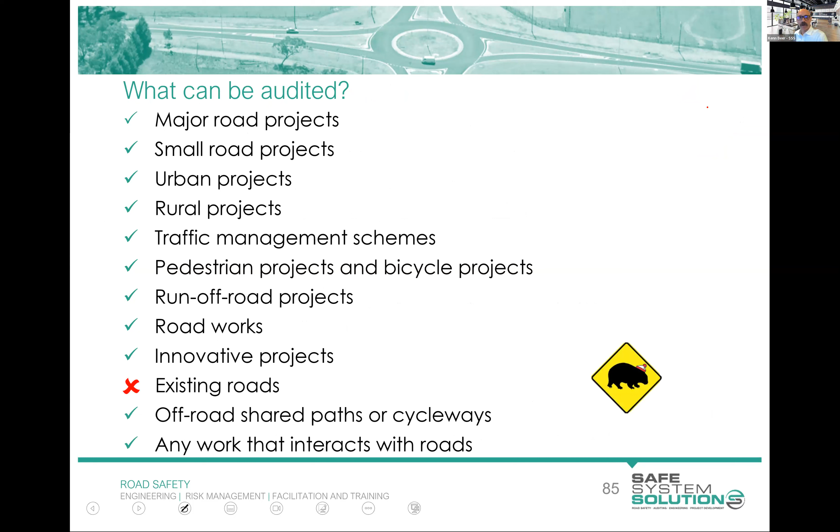In New Zealand, you don't do a road safety audit on an existing conditions road. That's not a use of that process, although I am told in practice it's in action. So that's what the official line is; I'm told in practice some people do.

And I think that is probably a point I hand over to Kathy, and I will start next session with this example. I don't think there's any more Wallies to come. I'll just double check my notes.

Why not on existing roads, please, Ken? As I say, most other jurisdictions do it. I think Waka Kotahi's just said no, existing roads can have a different process. Yeah, I don't have a good answer to that. The process that I just laid out works perfectly fine for existing roads as well. Yeah, crash reduction study, or like your Kiwi RAP assessment, or the like.